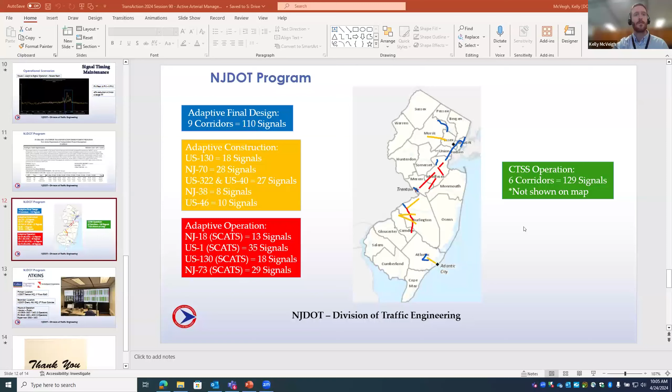As Donna said, my name is Kelly McVeigh. I work for the New Jersey Department of Transportation Division of Traffic Engineering. We've been working with adaptive traffic signals for some time. Back in around 2013, 2014, New Jersey DOT started to invest more time and energy into the research into adaptive systems, and then ultimately designing and constructing and operating them.

Something that I wanted to bring up, which is good to think about when you think of adaptive traffic signals, there's really two paths that can work simultaneously. They don't have to necessarily go hand in hand, but as you scale up, it's important that you keep track of both. That's the program side of things - the staff capabilities, maintenance resources, the funding that's available - as well as the technical side of things, so the standards that you would want to develop for standard plans, details, specifications, going through a systems engineering process for how you would develop a traffic signal system.

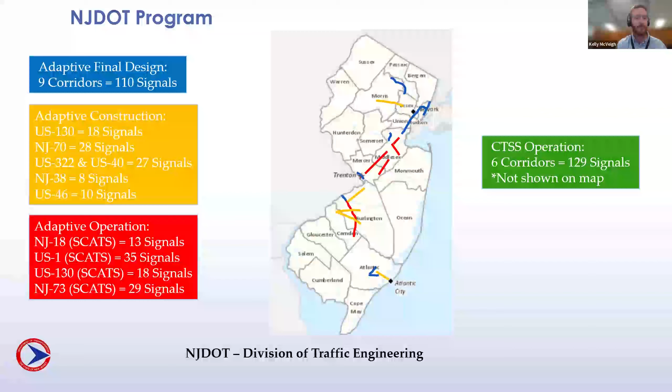I know I only have a few minutes left, so going back to the program side of things: in New Jersey we've developed an arterial management program, and the center of that is what we call the Arterial Management Center. It's like a specialized traffic operations center where we have staff augmentation, consultant support, as well as vendor support for the various systems through that contract. It operates 5 days a week from 6 a.m. to 8 p.m., monitoring the systems and monitoring incidents.

They're making recommendations on how a system can be revised to address certain issues if they see travel time degradation on a corridor, or they're noticing significant queuing on a certain approach. They will then collect all the data. There's tons of data to pull from various systems, including the adaptive systems themselves, and then providing that information to NJDOT engineering staff to further evaluate whether or not we want to make an adjustment to a parameter in the system.

That was something that we moved forward with. We had a pilot AMC program about 2 years ago, and then we moved forward with it last year. I could see this being perpetuated as long as we want to have adaptive systems in operation in New Jersey. We're going to need a program like this in place, so that somebody understands what's the detector health going, what's the status of detector health, communication to signals, and how's the system operating. I think with that, that's my experience here in New Jersey. I'd be happy to answer specific questions later, but I appreciate you listening and thank you for your time.

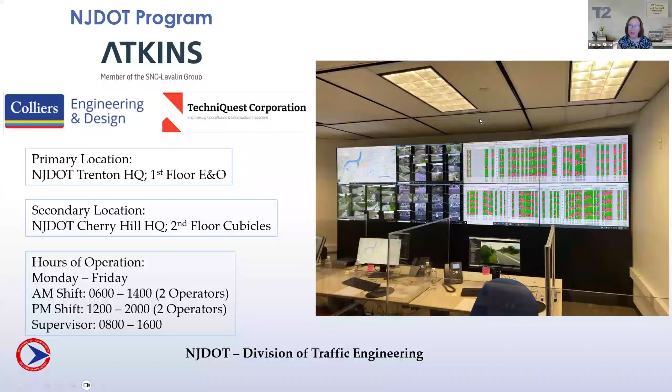All right. Good morning, everyone. I am Steve Gault with the Pennsylvania Department of Transportation, and happy to be here today and talk about what we've done with adaptive signals in Pennsylvania.

A little bit of overview on our traffic signal systems here in Pennsylvania. We have almost 14,000 intersections with traffic signals, and about 800 of those or so have adaptive signal technology currently. The map here is color coded. You'll see that a lot of the dots are the same color. That's the system we've had the most experience with, which is InSync, similar to what Kelly was mentioning.

One thing that's unique about Pennsylvania is that almost all of our traffic signals are owned and operated by the local governments. So we have almost 1,200 different local municipalities that own and operate the signals. Our role at the state is we issue permits for the operation. We usually are assisting with the construction phase of the original installation, but once it's installed, then the operations gets turned over to the municipality. So their input is very important in the process for us.

In terms of how we got to where we are now, really trying to understand where we had challenges with our signal operations program before. With all those municipalities, there was a lot of desire for addressing things where they may not have resources to do as much from an operations side. Vendors are always bringing new products to the market, and when they come up with new products, they always say that that's going to solve all of our problems.

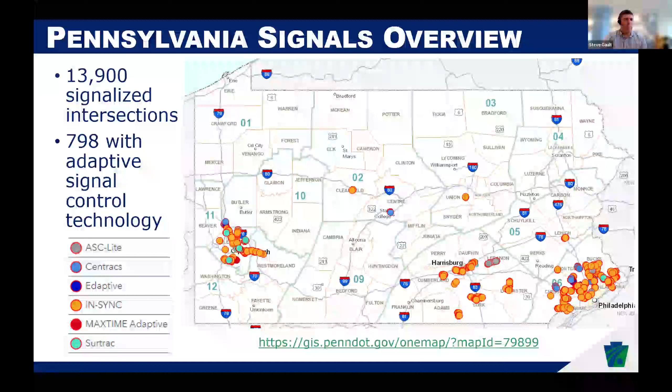So when we look back at some of the things we've done in the past, we've done things like closed loop systems, even things like preemption for emergency vehicles. Have we really met those needs and solved the problem that we're trying to solve? So we've really tried to improve our systems engineering process, and it's really trying to find that sweet spot between the complexity of a full-fledged systems engineering process and minimizing the risk of putting a lot of money and resources into a system and not having it achieve what we wanted to set out to do from the beginning.

So again, we want to make sure we're understanding those needs, defining the problem before we implement the solution. It's really where engineering, management, and the application domain experience all come together with all the different stakeholders, whether that be the operators who are going to use the system, anyone that it'll impact, such as those doing maintenance, even the political stakeholders from a management standpoint.

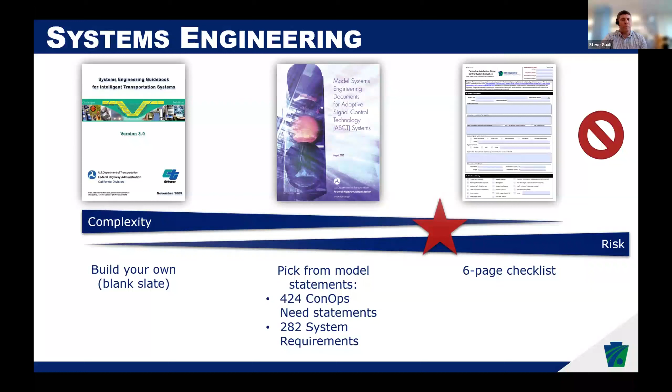So the Federal Highway Administration had developed some model systems engineering documents for adaptive signals, and for Pennsylvania, we tried to simplify this, and we came up with this 6-page checklist, which we call a Form TE 153. We're seeing that we may have oversimplified it, and that's led to sometimes our projects not delivering on what we want. So we're trying to find that sweet spot still, in terms of maybe introducing a little more complexity to help reduce the risk of the projects not meeting the needs.

With that in mind, we're starting to work on a toolbox for selecting signal systems. In the past it was a very adaptive focused process, but we're trying to expand that to consider a full range of signal operation strategies. The end goal is to have something similar to an intersection control evaluation, or ICE process, but at a corridor or network level.

Some examples of strategies that might come out of this process would be something as simple as a fully actuated signal in free operation, actuated coordinated operation, maybe pre-timed, adaptive is still in the mix, and even considering traffic responsive, one of those older technologies that didn't always get fully utilized.

Our toolbox is really looking to build a step-by-step process, and if we get to the end of stage 1 and there's only one obvious direction to go, then we don't need to continue through all the details in the later stages. Some of the factors we take into consideration are that timing optimization is really going to be most effective when

there's a range of signal timing that would be appropriate. For example, if we can change the cycle length a lot — otherwise there's not really much room to optimize the timings, and we're not likely to see much of a change in performance.

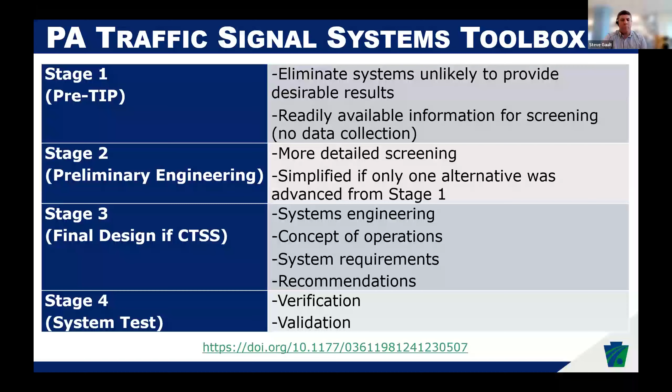There's a lot more detail. There's a link here — and I'm assuming we can get the slide shared afterwards — to a TRB paper that goes into that in more detail on what we're doing.

So some of the lessons we've learned: making sure that there's a plan for long-term maintenance and operations. If it's not there, the original operation will start to degrade over time.

As we've seen with some of the older closed loop systems, we've had some challenges with adaptive systems where there was a warranty for some of the initial years, and then there wasn't a desire to pay for keeping it operating beyond that.

The vendors are really a key piece in deploying an adaptive system, so they're the ones that are going to know how the system works. Depending on the system, the signal timing engineers may have more or less ability to turn the knob, so to speak, and manipulate things when they're not operating as desired. So sometimes that leads to essentially having to outsource that signal timing to the vendor.

We've had some challenges with doing the validation and verification to make sure that does get completed, to make sure that we're meeting those objectives. Pedestrians and preemption can really impact the operation.

Detection is the most important thing, no matter what system you choose, because that's really going to be determining those inputs that lead to how it's going to do the optimization. And like I was mentioning, maintenance is also important.

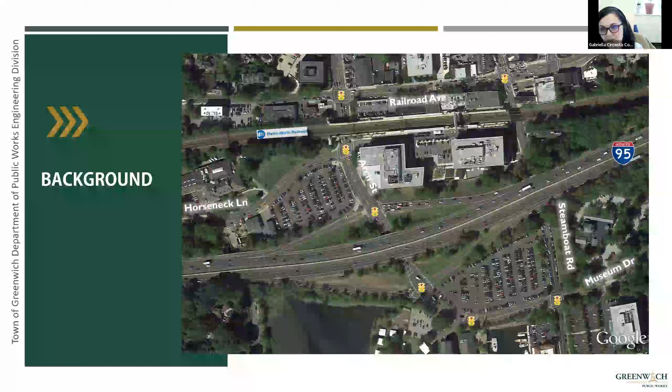A CMAQ grant opportunity came up about the same time, so we jumped on the opportunity to submit an application, and we were awarded the project.

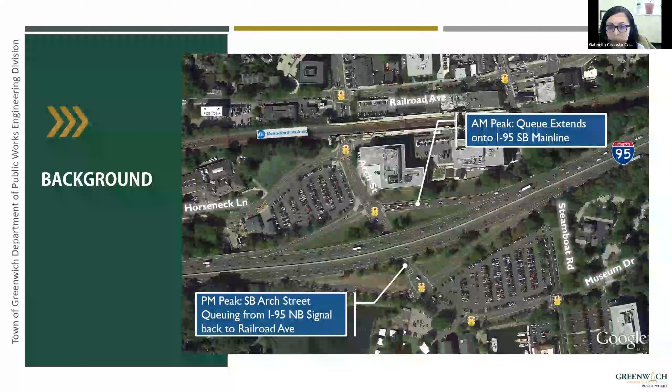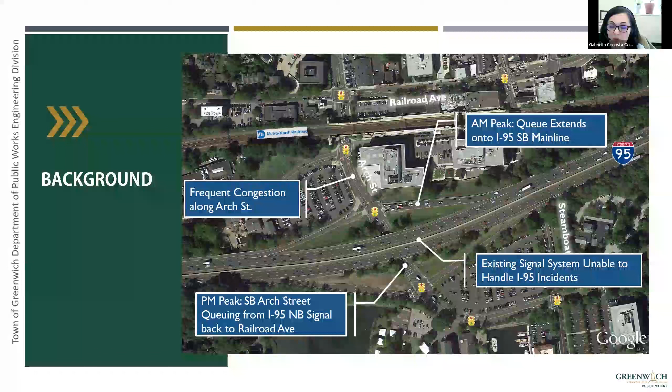So the problems we saw here were the queuing at the I-95 southbound main line, the Arch Street queuing at I-95 northbound, along Arch Street for the entire length. The existing signal system was unable to handle the I-95 incidents. Sometimes there were closures, and it was just mass volume, especially during peak times, and the train station arrival departure demands.

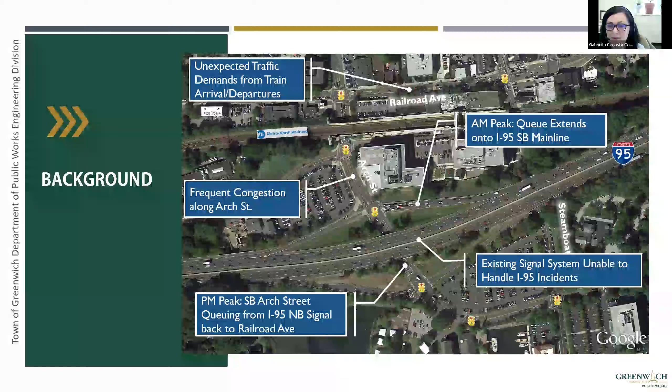So in reviewing several different options, we decided that adaptive signal control technology checked all the boxes. Unlike traditionally timed traffic signals, adaptive signal control technology accommodates challenging traffic patterns and calculates a traffic signal timing plan based on the changing traffic conditions on the roadway caused by traffic crashes, special events, road construction, and other roadway incidents in real time.

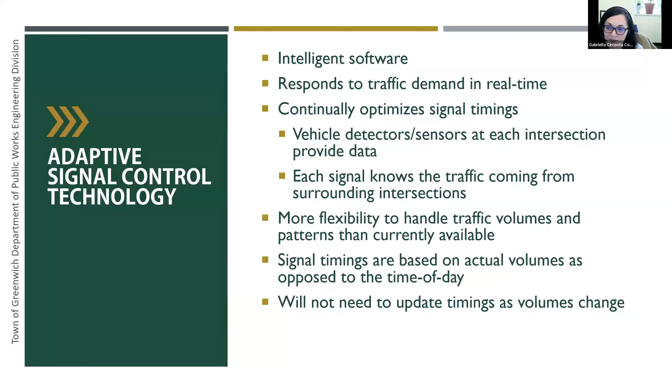We were excited to find out that the new adaptive signal traffic system is able to detect an influx of vehicles and improve the traffic congestion by instantly adjusting the timing of the traffic lights at all 5 intersections.

So once we decided we were going in this direction with the design process, with this project utilizing the CMAQ grant funds, it involved the installation of new adaptive signal control technology along the corridor, the replacement of mast arms, control boxes, PED signals, sidewalk sections, pedestrian ramps, replacement of a signalized driveway with an RRFB, installation of a full fiber network, and new signage. So it was a pretty big project compared to what we're used to.

The design and construction of the project was 100% reimbursable under the Federal Highway CMAQ program, up to $2.75 million. Of course, with the CMAQ program, there was additional paperwork involved when it came to the design and construction process, and that was a huge undertaking.

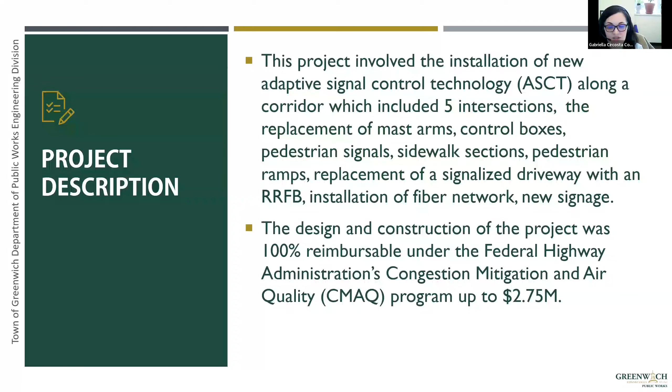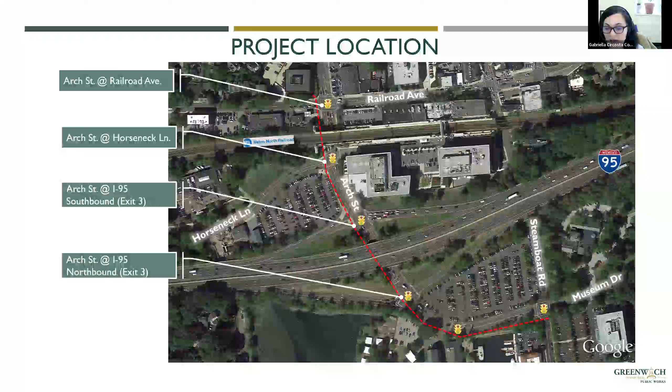And so those intersections which benefited the most from this project were Arch Street at Railroad, Arch Street at Horseneck Lane, Arch Street at I-95 southbound exit 3 ramp, northbound exit 3 ramp, at Roger Sherman Baldwin Park, where we host many events, and at Museum Drive.

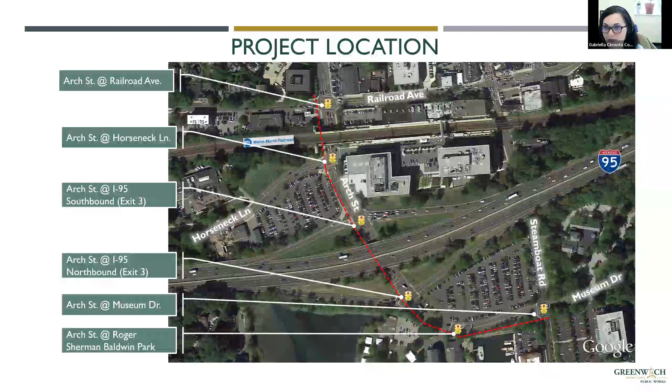As for the brains of the system, all 6 intersections received a 352i low voltage DC ATC cabinet. The new traffic lights, control boxes, and pedestrian signals are now more efficient and use 66% less energy, which is one of my favorite advantages of this project. These cabinets contain the latest technology needed to run the signalized intersection, including battery backup.

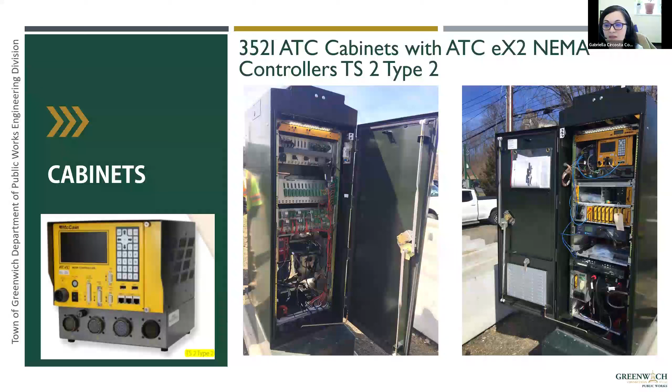Each traffic control box communicates with each other in real time through a fiber optic network, which was also installed as part of this project.

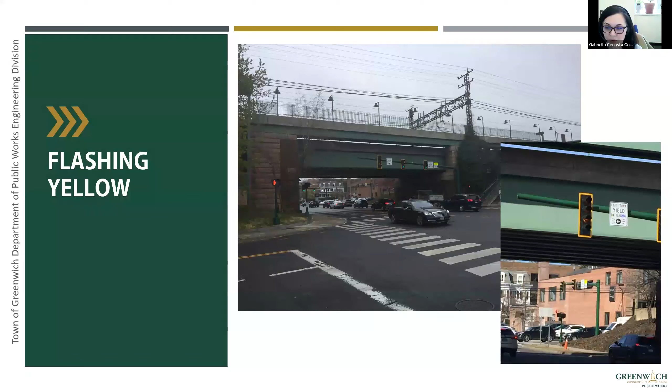This project also introduced the first flashing yellow arrow in the state of Connecticut. The flashing yellow arrow is a new type of signal located in a dedicated left turn lane at a signalized intersection and signifies yield to oncoming traffic and then proceed with caution. This alleviates traffic and queue time by allowing vehicles to turn when there's no traffic in the opposing direction. Prior to the flashing yellow arrow, motorists had to wait for the green light to make that turn, which had contributed to incredible backups in this area.

Miovision cameras were installed on the traffic signals, which serve the purpose of collecting and analyzing traffic data on directional traffic flow, vehicle delay, and lane queue length. These cameras can even detect if a pedestrian, bicyclist, and the type of vehicle, whether it be a car, SUV, truck, tractor, trailer, are traveling through the intersection.

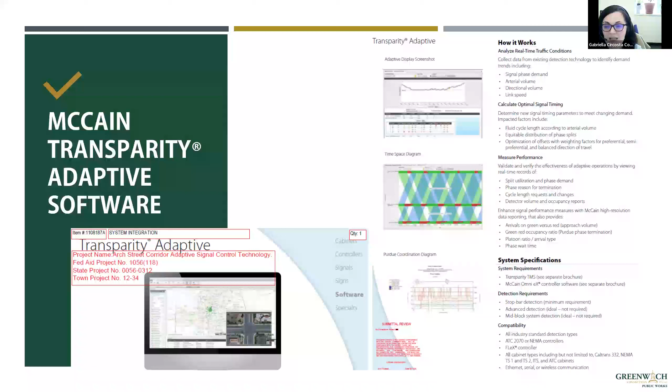The McCain Transparity Adaptive software, which is what we use, receives the traffic data from the controllers, and the signal timing is adjusted and improved based on the data received. Since this technology is steadily monitoring the roads, traffic flow is consistently modified depending on traffic patterns throughout the day.

Our experience to date has been mostly positive with adaptive signal control technology implementation. It was the first unseen improvement, as the implementation has been mostly behind the scenes in the controller box and cloud, and not visible construction, as is the case with a lot of our other projects that I'm involved with. After the installation of the new mast arms, control boxes, and fiber network, public comments were consistently that your state-of-the-art technology isn't working, but our response prior to it functioning was, well, it hasn't really been implemented yet.

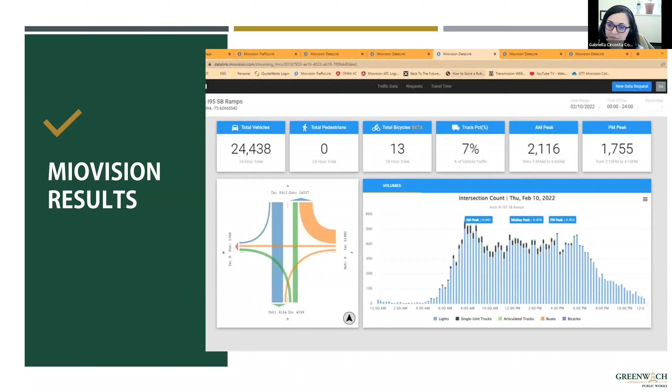We didn't flip the switch yet on the ASCT. So once it was all installed and after implementation, of course, there were no complaints. We did receive a few compliments. We liked it so much, we decided to pursue the installation of adaptive signal control technology along Route 1. The final design was just completed, which will include adaptive signal control technology from the New York border to Stamford.

As for lessons learned, it's important to know what is compatible with the controller standard in place. Not all adaptive systems are compatible with certain controllers at that time. It's important to know upfront which technology will interface with the municipality's existing traffic operations system. In addition, it's important to understand that ASCT is not ideal for all locations and shouldn't be looked at as the initial go-to for solving traffic issues. A proper review of the existing conditions should be assessed before deciding which way to go.

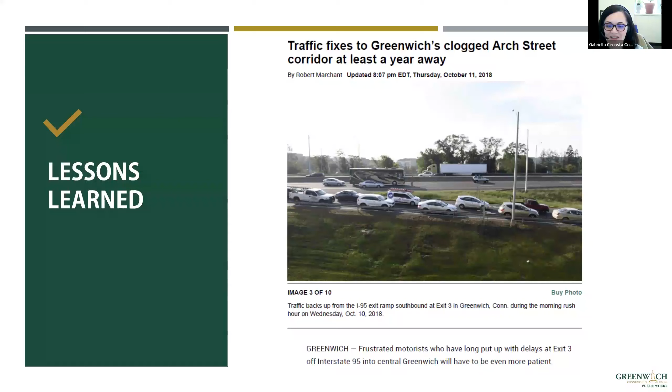There were some challenges when deploying the system and a bit of a learning curve for our staff responsible for the signal operations. There was a great team involved in this deployment, and it was ultimately a successful project. Post-implementation, our police department was used to the old way of overriding the signals during large events with high traffic volume. So being that the adaptive is designed for these events, it was difficult to communicate to them to just let the signal handle everything on its own and stay out of its way.

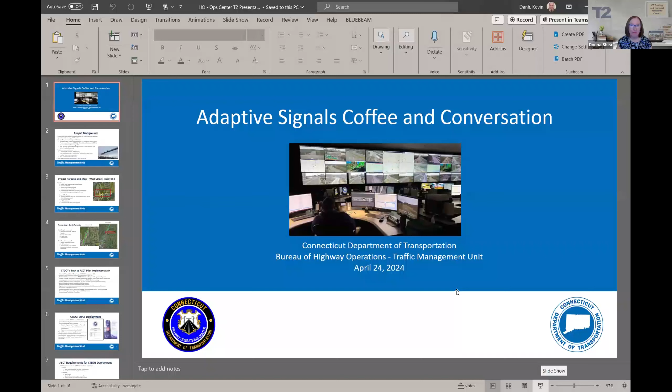Hi, good morning, everyone. It's really exciting to see such a great turnout for this coffee and conversation. Just wanted to provide a brief background for Connecticut DOT.

Our agency has been operating computerized traffic signal systems since the 1980s, using mostly time-of-day operation. We did some early traffic responsive operations in some corridors, but we just weren't satisfied with the results since the responsive system did not sufficiently modify timings to traffic demand that was in place. We especially noticed that it just didn't adjust the timings and offsets to react to changes in directional traffic flow. So we stuck with time of day plans for many years.

We spent a lot of time fine tuning the plans and performing periodic timing plan reviews on a system by system basis. We were familiar that other agencies were implementing traffic adaptive. It was always of interest to us, but we just didn't have the required infrastructure that we needed to run adaptive or to try it. That included things like full detection on all approaches and high-speed communications between the field equipment and the central system.

But recently, we were able to upgrade a lot of our signals to the latest standards. We're in NEMA state here in Connecticut. We have about 1,000 computerized signals right now. And we were able to get our detection systems, communications infrastructure, and our central control system updated.

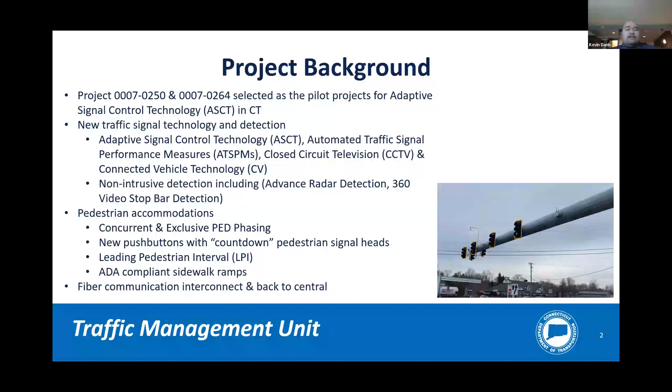It's all good. Yeah, like Hal said, Project 7264 involved the implementation of adaptive as a pilot for Connecticut DOT. It also included ATSPMs, CCTVs, and connected vehicle technology. And like all adaptive systems, we had to make sure we are putting detection. Detection is very important for the adaptive system. It also included other things like pedestrian accommodations that you guys see on the screen, and the necessary fiber connection, recommended fiber connection for adaptive.

Like Hal said, we had a project purpose. We wanted to reduce travel time along the Berlin Turnpike, possibly decrease emissions, improve signal reliability, improve pedestrian mobility, and so on. We wanted to test adaptive before going on the Berlin Turnpike, and we tried it in front of the lab. We initially put it at 6 locations, but now only 4 is actively being used, and this is based on the time of day operations versus the need for diversion or detours if we ever needed to.

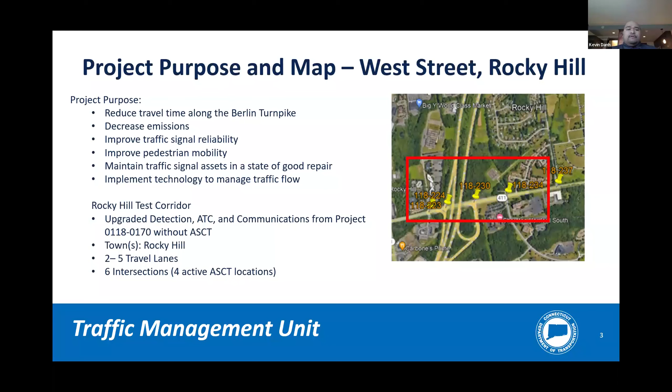As we got going with Rocky Hill, we went on to put adaptive on the Berlin Turnpike as part of the 7250 project. Once, of course, construction activities was complete, we had the necessary detection, communication infrastructure. We started with the adaptive implementation.

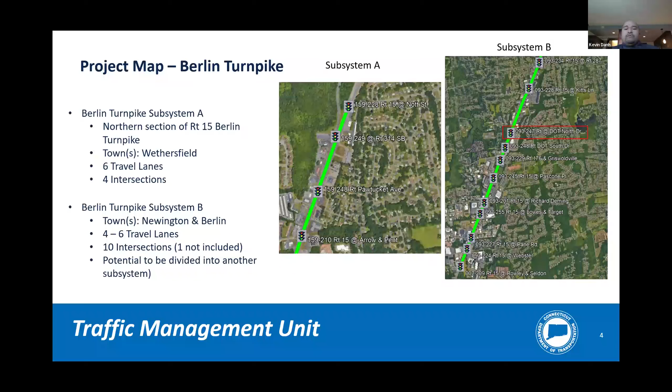There are 2 subgroups right now based on the adaptive deployment. As you guys can see, there's subsystem A and subsystem B. And the grouping is definitely important, as we saw, as we are continuing to see, because intersections can be impacted if there are potential changes at a main intersection.

So our path to adaptive was not easy. There were initial steps that we had to do, and this all started when we started our Rocky Hill project, Project 118-170 and Project 118-185, that was completed in 2020. That included the upgrade to fiber interconnect from copper interconnect for the Rocky Hill systems, establishing a fiber connection from HQ to the signals into our signal lab.

Of course, we also found out that our server was outdated and we needed to update the server racks, pay for the operating systems, pay for the switches, pay for the cores, pay for software licenses and necessary power connections for that server to operate to run the new software, ATMS.Now.

This also included communication upgrades in the head-end, both from the admin building into the lab building, and also upgrading the Cat3 connections at the lab to Cat6. We also purchased improved, better computers and field equipment laptops so that the lab can be able to do what they have to do to manage our systems.

Of course, there was also upgrade to the non-intrusive detection technologies, and then installation of ATC controllers for all 19 locations in Rocky Hill, and the typical signal upgrades, which includes crosswalks, spans, mast arms, etc. And then we also had to go through the process of procuring ATMS.Now.

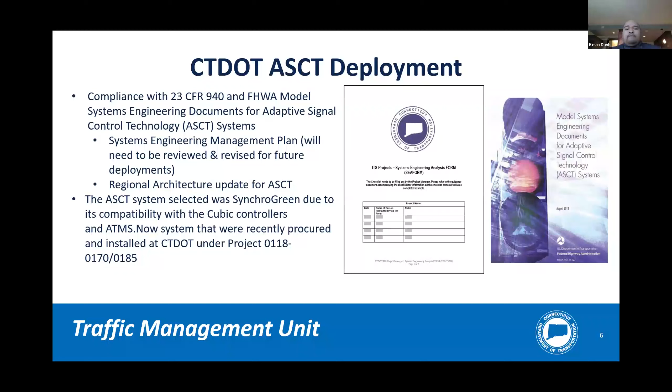Of course, with the adaptive requirements, we have to consider stuff like the server and the software. For Synchro Green, we had to make sure we had ATMS.Now, and we had to have the Synchro Green licenses per the controller.

For servers, we had to consider, like I mentioned before, we had an outdated server that did not meet the minimum requirements of the software. We also need to consider going forward, if we were to deploy more adaptive, the need to back up

and having some redundancy. Like everybody else mentioned, there was a need for ATC controllers, communication both in the field level for the interconnect, and communication back to Central. I know Kelly mentioned fiber is recommended for New Jersey, or wireless, and we are in agreement with that approach.

We also have to make sure that Central had the equipment, both server and communications upgrade as well. Of course, again, detection is very important. Without all these, the adaptive will not function with its full capability or work to what we expect it to be.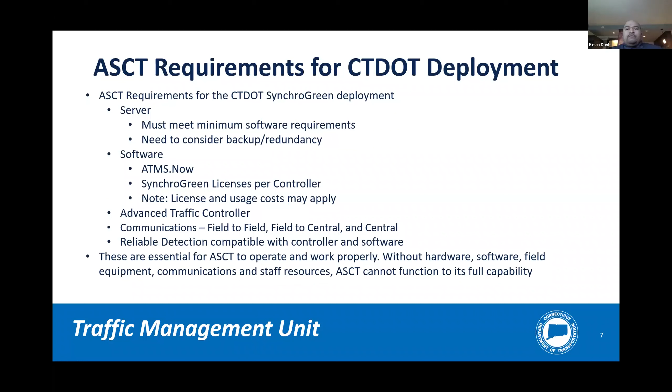As our current progress for adaptive, we implemented adaptive, of course, after construction was mostly complete, and it started in August 2023 with coordination with the manufacturer, the signal lab, and our highway operations staff.

The review is still ongoing. There's a lot of things that we're learning. Every time we see it operate, we have more questions. So it's definitely something that is not set and forget, and it's an ongoing process.

You need active operations and maintenance, and we need to evaluate the need for how the signals are being used and how the corridor is being used. Is it used on a time of day basis, or is there a potential detour opportunity?

Of course, like all signal equipment, we have to make sure that everything being used to operate the adaptive system is working correctly and functioning properly. Our experiences for the adaptive deployment included seeing instances of, going back a step,

Having more detectors out there and ensuring accuracy allows the adaptive to run the best it can. Having more detection gives that flexibility to make sure that adaptive is running the best it can.

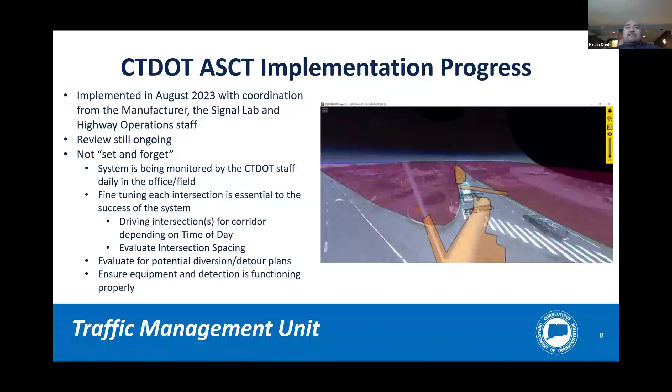Some experiences and issues that we encountered were skipping phases, split failures, min-time violations, in and out of coord occurrences, and some inconsistent patterns and transitions.

There was some confusion at the end of how our signals are designed in terms of phasings, geometric layout differences, the way the signals are grouped together, and how our coordinated phases are, whether it be phase 2 and 6, or if phase 3 was a coordinated phase or not.

Kevin, you have about a minute before we enter the Q&A.

Yep, okay, no problem. Vendor support was definitely important, of course, and we needed to make sure that that was there. Some next steps include, like Steve mentioned, we want to evaluate adaptive.

Adaptive is not the best for all locations. We want to put together a checklist following the systems engineering process, and we've got to make sure that it works with our technology. Of course, there is SynchroGreen.

For our case, we have heard that there's modeling. We're not able to do the modeling, and the SynchroGreen modeling software is outdated and not currently available.

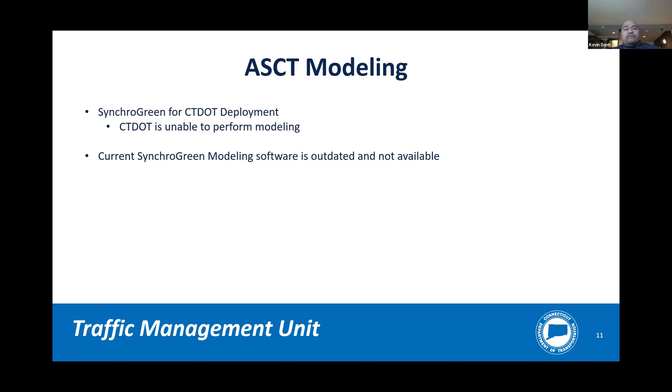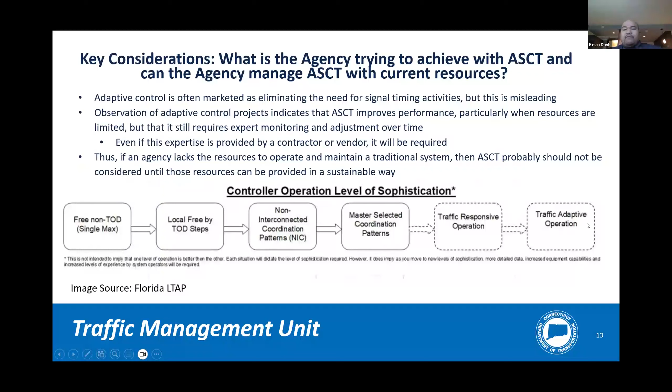There's also key considerations as to why agencies would be putting in adaptive. That includes: if they are not comfortable with a closed loop system, why jump to adaptive operations? Are they able to operate and maintain it?

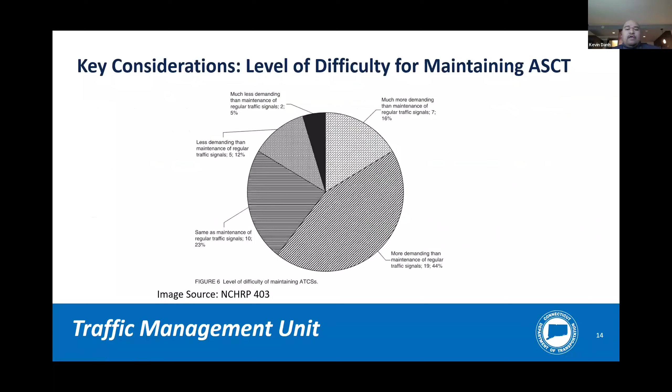And then there are difficulties for maintaining adaptive. Based on the NCHRP report 403, it's a little dated, but it shows it's more demanding to maintain traffic signals with adaptive. There are some key considerations based on the report, and that's it from my end.